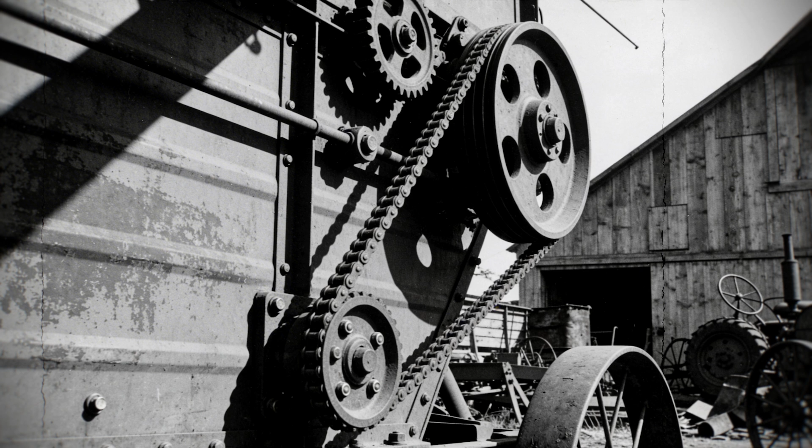This isn't a hypothetical nightmare. This happened to 89 real farmers across America, and the company that built these machines knew about the deadly flaw for years but did almost nothing to stop it.

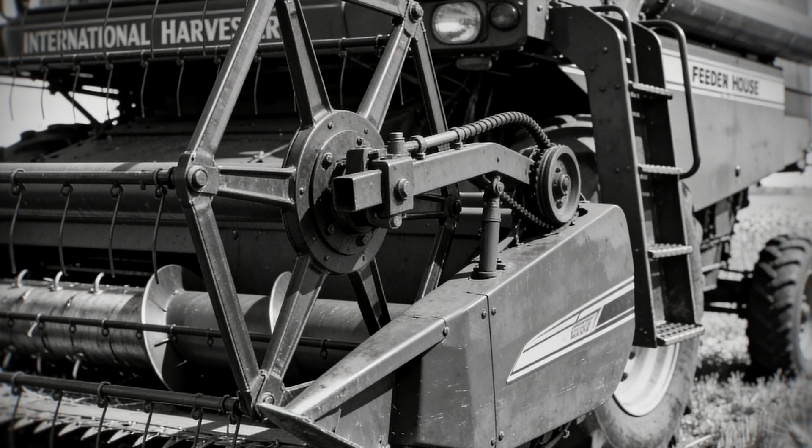International Harvester was once an American icon, a name that defined farming for generations. Founded in the early 1900s, the company built tractors, combines, and equipment that helped feed the world. By the 1970s and 80s, their red machines were everywhere, from family farms in Iowa to massive operations in California. Farmers trusted the brand because International Harvester had earned that trust over decades. But that trust was about to be shattered in the most brutal way imaginable.

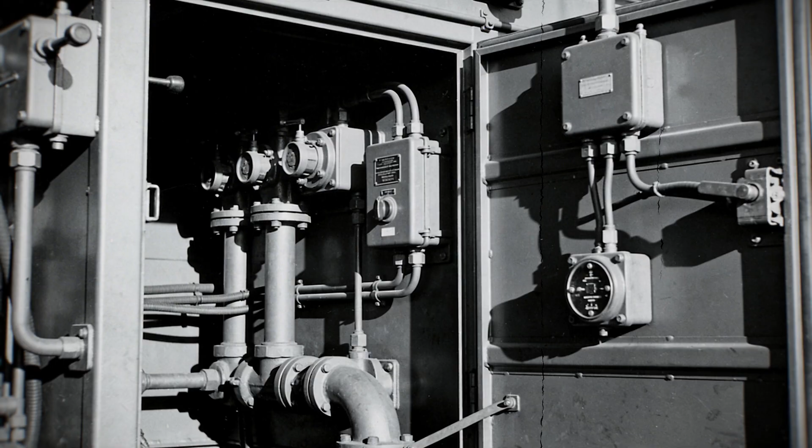The company introduced a line of combine harvesters that featured a design element that seemed innovative at the time: a hydraulically operated feeder house door. This door was positioned at the front of the combine where crop material entered the machine. It needed to open for maintenance, adjustments, and clearing blockages, which happened frequently during harvest. The hydraulic system meant the door could be opened and closed with the flip of a switch, no manual lifting required. Sounds convenient, right? But hidden within this convenience was a ticking time bomb that would destroy lives.

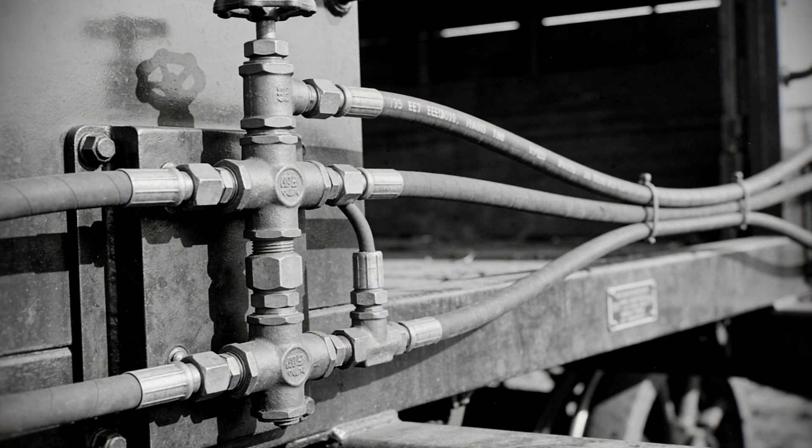The problem was simple but devastating. The hydraulic system that controlled the feeder house door had no safety mechanism to prevent it from closing unexpectedly. None. No redundant valve, no mechanical lock, no warning system. If there was a pressure surge in the hydraulic system, which could happen for various reasons, including normal vibrations from the machine's operation, the door could slam shut without warning.

And because the door was positioned exactly where farmers needed to reach in to clear crop blockages or make adjustments, their hands and arms were constantly in the danger zone. Imagine working on a machine where a 200-pound steel door can close on you at any moment, with enough force to crush bone like it's a soda can.

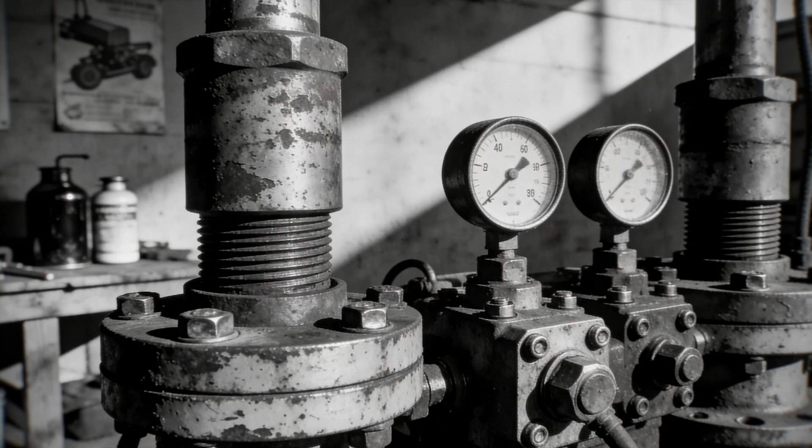That was the reality for thousands of farmers who bought these combines. The force wasn't gentle, it wasn't a pinch. Hydraulic systems operate at pressures of 2,000 pounds per square inch or more. When that door closed on someone, it closed with the kind of force normally reserved for industrial presses.

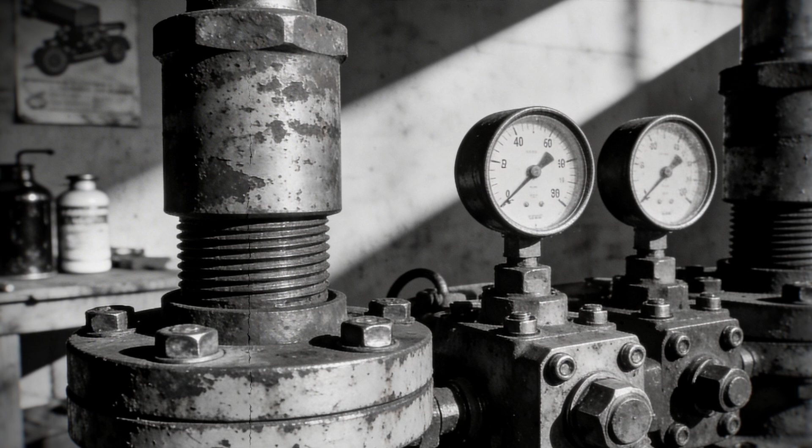The first incidents started appearing in the late 1970s, shortly after these combines hit the market. A farmer in Nebraska reached into the feeder house to clear a blockage of wet straw, a routine task he'd done 1,000 times before on older machines. The door closed on his hand, severing 3 fingers instantly. He was rushed to the hospital, but the damage was done.

His farming career, which had spanned 3 generations of his family, was effectively over. He couldn't operate equipment with one hand. He couldn't do the physical labor that farming demanded. His entire livelihood was destroyed in a fraction of a second.

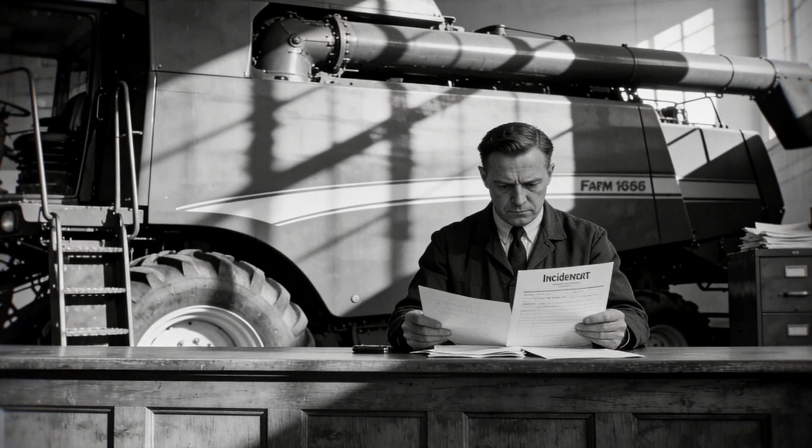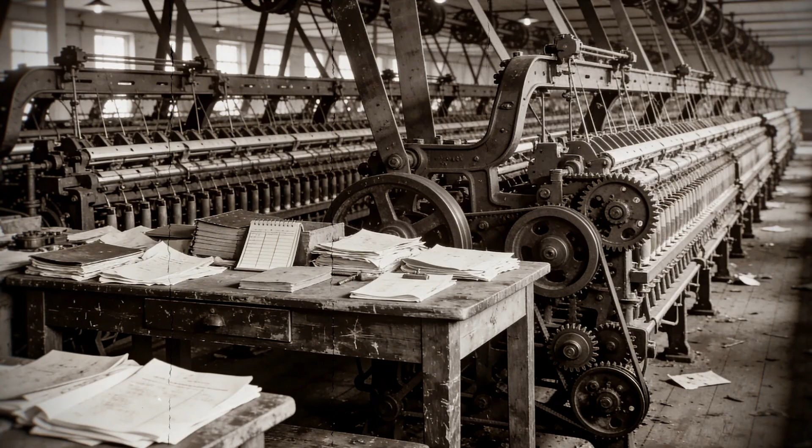And here's the kicker. International Harvester was notified about this incident. The dealer who sold him the combine filed a report. The company knew that their design had just destroyed a man's hand. But instead of issuing a recall or even a safety bulletin, they did virtually nothing. They treated it as an isolated incident, an anomaly, bad luck.

Except it wasn't isolated at all. It was the beginning of a pattern that would repeat itself dozens and dozens of times. Over the next several years, similar incidents kept happening with disturbing regularity.

A farmer in Kansas lost 4 fingers. Another in Missouri had his entire hand crushed so severely that amputation was the only option. A father and son operation in Illinois saw the son's arm broken in 3 places when the door closed on him mid-forearm. The stories were horrifying, and they all followed the same script.

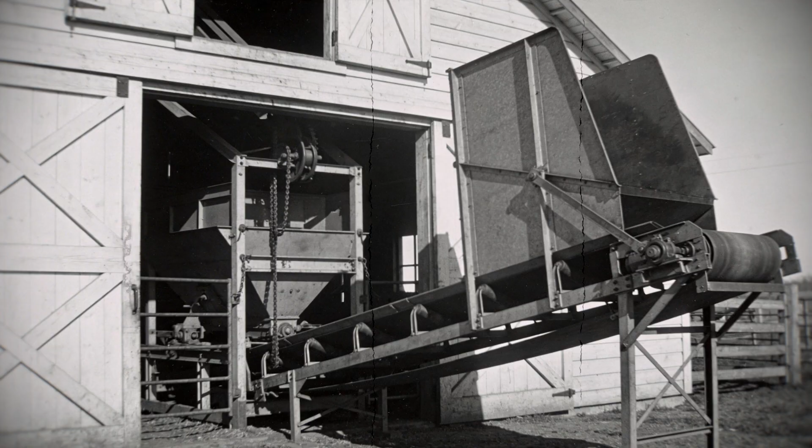The farmer would be doing routine maintenance or clearing a blockage. The feeder house door would be open. Then, without any warning, without any input from the operator, the door would slam shut. The force was so immense that victims described hearing their own bones snap before they felt the pain.

Many went into shock immediately. Those working alone in remote fields faced an additional nightmare, trying to free themselves from the machine while in excruciating pain, then driving themselves to get help before they bled out.

Some farmers were trapped for hours before help arrived. The psychological trauma of these incidents was almost as devastating as the physical injuries.

Now, you might be wondering how International Harvester responded to these mounting injuries. Surely, once they had multiple reports of the same type of injury occurring on the same model of equipment, they would take action, right? Here's where the story gets even darker.

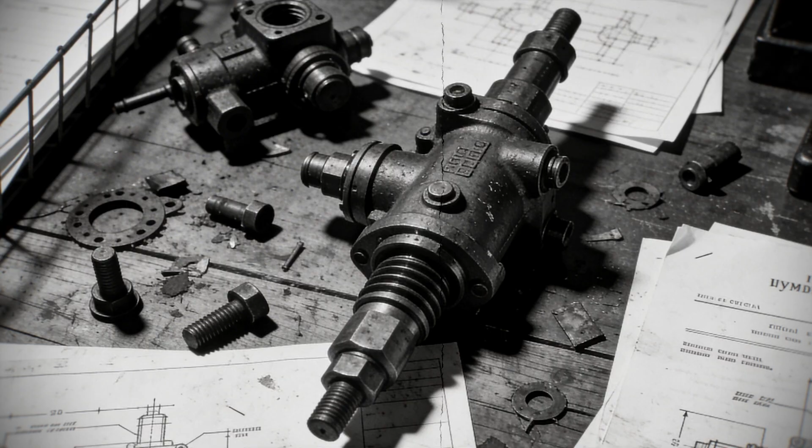Internal documents that later came to light during legal proceedings showed that the company was absolutely aware of the problem. Dealers were filing reports. Farmers were calling in complaints. The pattern was unmistakable. But International Harvester made a calculated business decision.

They determined that issuing a recall or redesigning the hydraulic system would be too expensive. They ran the numbers and decided that it was cheaper to deal with lawsuits from injured farmers than to fix every machine in the field.

Let that sink in for a moment. They knew people were losing fingers, hands, and arms. They knew the design was defective, and they chose profit over safety. This wasn't negligence. This was a conscious choice to value money over human lives and livelihoods.

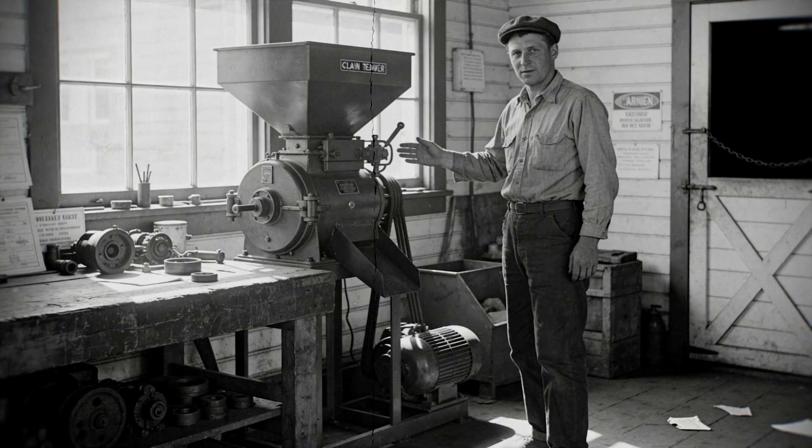The dealers who sold these machines were in an impossible position, as many of them knew about the defect because they were hearing directly from their customers who'd been injured or who'd had close calls. Some dealers, to their credit, tried to warn new buyers.

They'd tell farmers to be extremely careful around the feeder house door, to never reach in without first shutting down the entire machine, to treat the door like it was spring-loaded and ready to kill you. But these warnings weren't standardized, and they weren't nearly enough.

Other dealers, either unaware of the full scope of the problem or unwilling to jeopardize sales, said nothing. They'd hand over the keys to a $60,000 combine and send the farmer on his way without mentioning that the machine had a design flaw that could cost him his hand.

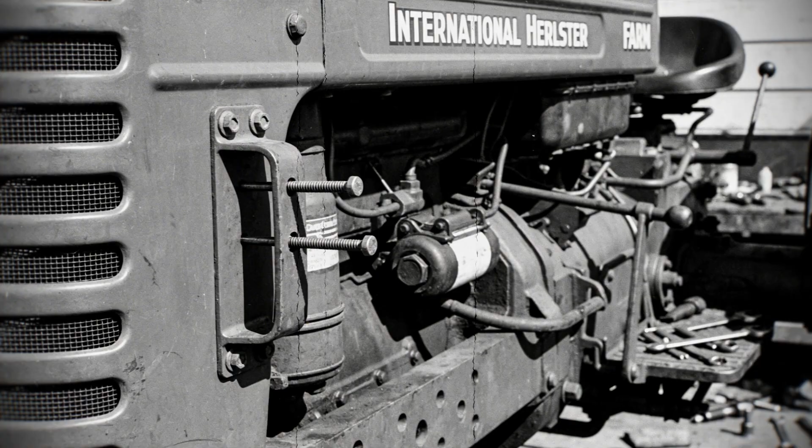Some dealers did try to jury-rig solutions, like installing manual pins that could lock the door open, but these modifications weren't approved by International Harvester, and they voided warranties. Farmers were caught in a nightmare scenario where the machine they'd mortgaged their farm to buy could maim them at any moment.

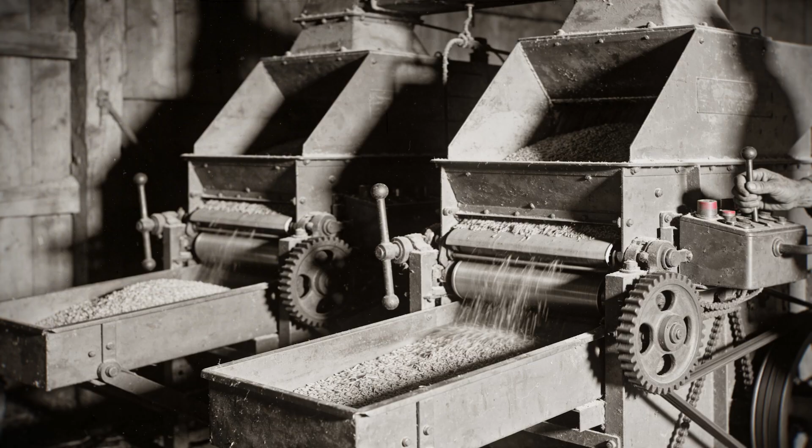By the mid-1980s, the injury count had climbed to 89 documented cases. 89 farmers who'd lost fingers, hands, or suffered severe crush injuries. And those were just the documented cases, the ones that made it into official reports or lawsuits.

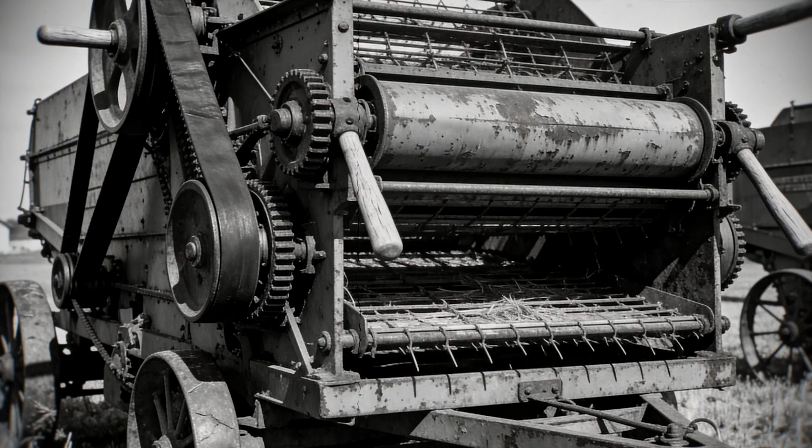How many more close calls happened that were never reported? How many farmers had the door close on them, but managed to pull their hand away at the last possible second? How many minor injuries occurred where the farmer just bandaged himself up and went back to work because harvest doesn't wait and he couldn't afford downtime? The real number of people put at risk was certainly much higher.

Each of those 89 documented cases represented a family devastated, a livelihood destroyed, and years of medical procedures and rehabilitation. Many of the victims required multiple surgeries to reconstruct mangled hands. Some never regained full use of their injured limbs. The medical bills alone were staggering, and this was before the era of widespread health insurance coverage for farmers.

The legal battles that eventually erupted were fierce. Injured farmers started suing International Harvester, and as more cases piled up, the pattern became undeniable.

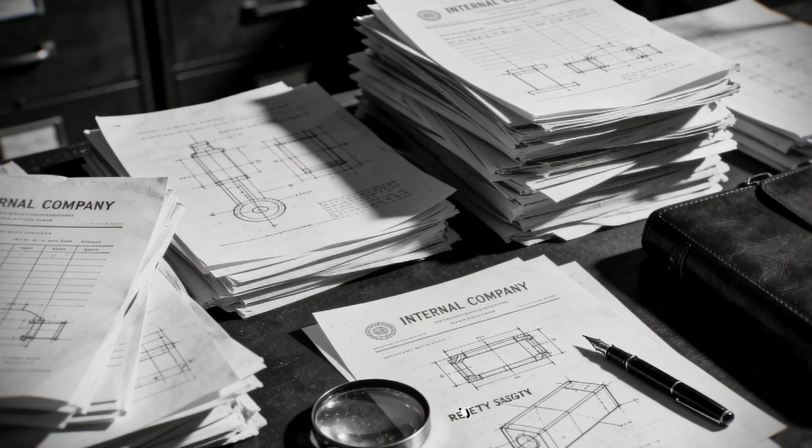Lawyers obtained internal company documents through discovery that showed the company had knowledge of the defect years before they took meaningful action. Testimony from engineers revealed that alternative designs with safety features had been proposed but rejected as too costly. The evidence painted a damning picture of a corporation that prioritized its bottom line over customer safety.

Juries were sympathetic. In several cases, they awarded not just compensatory damages to cover medical bills and lost income, but also punitive damages designed to punish the company for its reckless behavior.

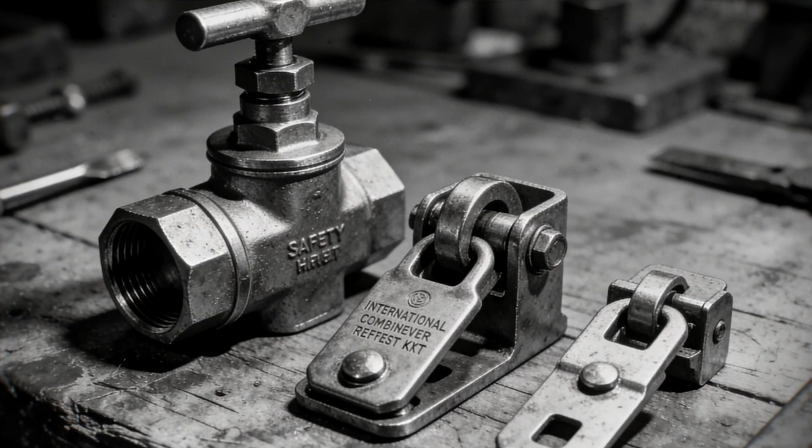One case in Iowa resulted in a multi-million-dollar verdict when the jury heard testimony about how many internal reports the company had received before the plaintiff lost 3 fingers. The message from these juries was clear. If you know about a deadly defect and you choose to do nothing, you're going to pay.

Eventually, under pressure from mounting lawsuits and negative publicity, International Harvester did issue a retrofit kit for the affected combines. This kit included a safety valve that would prevent the accidental closure of the feeder house door and a mechanical lock that could be engaged when someone needed to work near the opening. It was exactly the kind of fix that should have been included from day one.

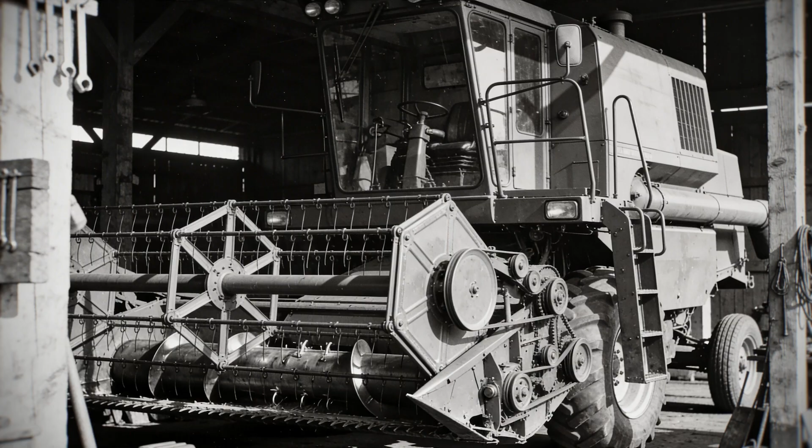But by the time this retrofit was rolled out, 89 farmers had already paid the price for the company's negligence. And even then, the retrofit wasn't automatic. Farmers had to bring their combines in to have the kit installed, and many never got the word or couldn't afford the downtime during critical harvest periods.

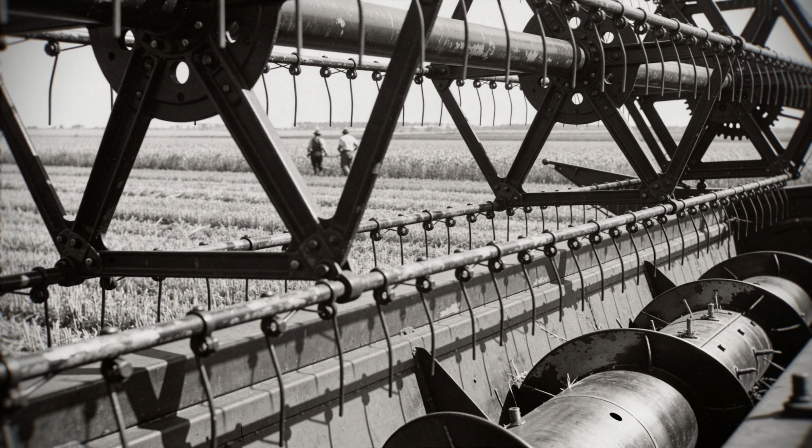So even after a solution existed, there were still dangerous machines operating in fields across the country. International Harvester also didn't admit any wrongdoing. They framed the retrofit as a product improvement rather than a safety recall, trying to protect themselves from additional liability.

The aftermath of this scandal went beyond the individual victims. International Harvester's reputation took a massive hit among the farming community. Trust, once broken, is incredibly hard to rebuild, especially in tight-knit rural communities where word travels fast. Farmers started looking at other brands, and International Harvester was already struggling financially due to other business problems.

As the company eventually collapsed and was absorbed by other agricultural equipment manufacturers, while it's impossible to say exactly how much the feeder house door scandal contributed to the downfall, it certainly didn't help. The 89 victims and their families were left to pick up the pieces of their lives. Many had to leave farming entirely because they could no longer perform the physical work. Some sank into depression, watching their family farms get sold off because they couldn't operate them anymore. The ripple effects touched entire communities as productive farms went under, and families struggled with medical debt and disability.

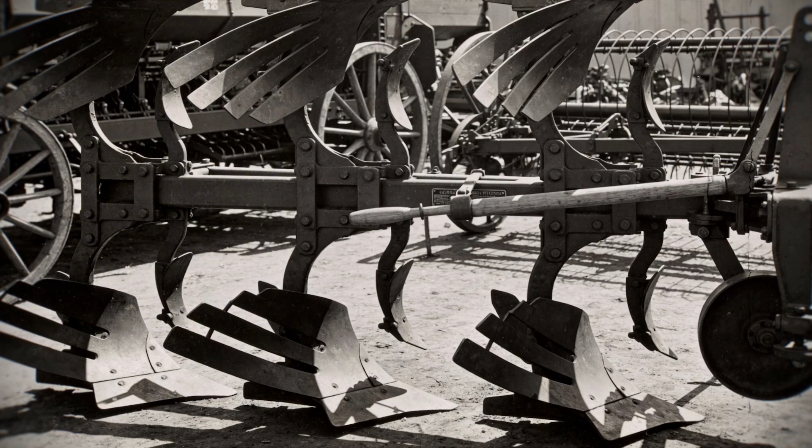So, what are the lessons from this tragic chapter in American agricultural history? First, it's a stark reminder that corporate accountability matters. When companies know about defects and choose to hide them or ignore them, people get hurt. The system of lawsuits and legal liability exists precisely to give victims recourse and to punish companies that put profit over safety.

Second, it shows the importance of regulatory oversight in industries where dangerous machinery is involved. While farming equipment isn't regulated as heavily as, say, automobiles, perhaps it should be. Farmers deserve the same safety protections as any other workers.

Third, this story highlights the vulnerability of farmers, who often work alone with dangerous equipment and who face intense economic pressure to keep working, even when conditions are unsafe. The pressure to get the harvest in, to keep the farm running, to avoid costly downtime, that pressure led many farmers to take risks they shouldn't have had to take.

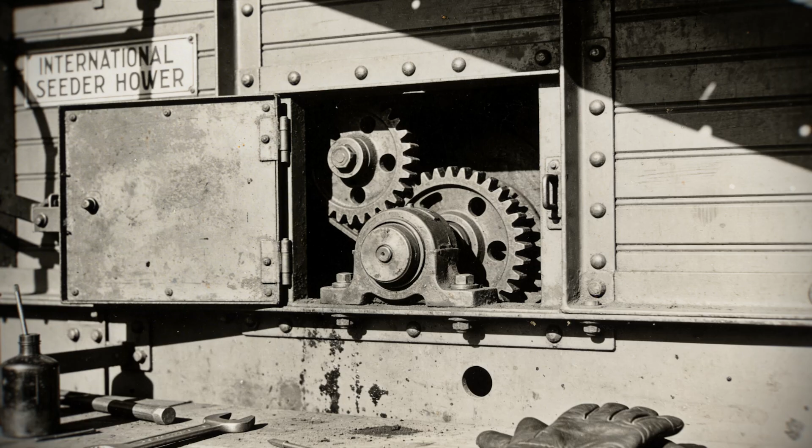And finally, this is a story about the human cost of negligence. Behind each of those 89 cases was a real person with dreams, responsibilities, and families who depended on them. The International Harvester feeder house door scandal isn't just ancient history. It's a cautionary tale that remains relevant today.

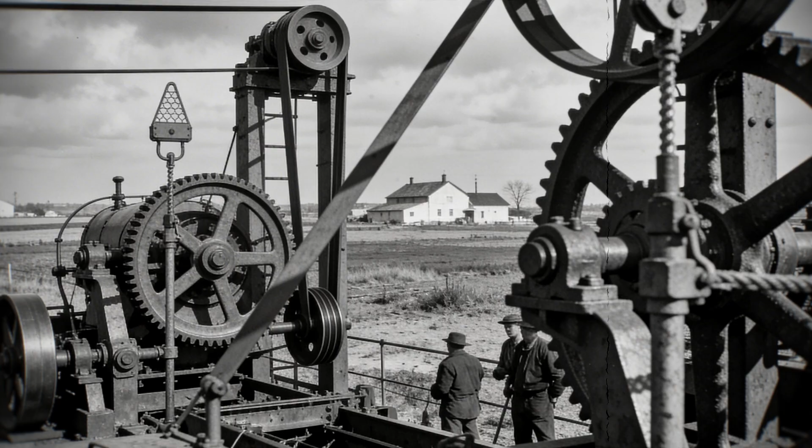Agricultural equipment is more complex than ever, with computerized systems and automated functions that can fail in unexpected ways. Farmers still work with dangerous machinery every single day, often in isolated conditions where help isn't immediately available.

The question we should be asking is, has the industry truly learned from disasters like this one? Are modern equipment manufacturers building safety into their designs from the ground up? Or are they still making cost-benefit calculations about whether it's cheaper to pay lawsuits than to engineer better safety features? The answer, unfortunately, is mixed.

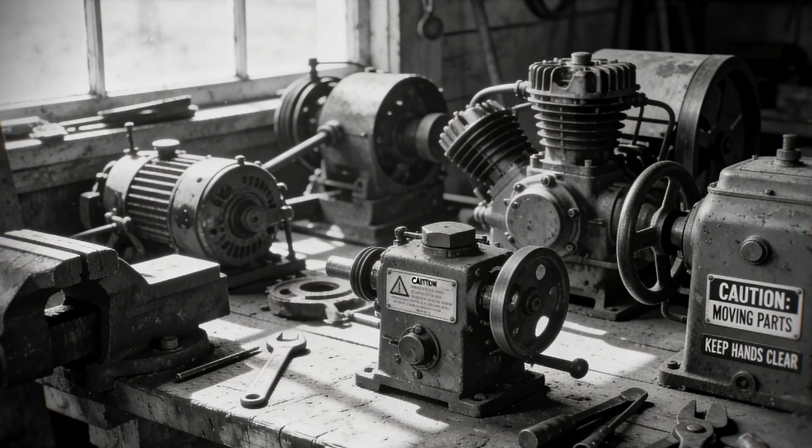While safety has generally improved and modern equipment does include more safeguards, there are still incidents of preventable injuries occurring because a manufacturer cut corners or failed to adequately warn users about known risks.

If you're someone who works in agriculture or knows farmers, this story should resonate deeply. It's a reminder to never trust that equipment is safe just because it's new or because it comes from a reputable brand. Always read safety manuals, always follow lockout procedures when doing maintenance. Why? And never assume that a company has your best interests at heart.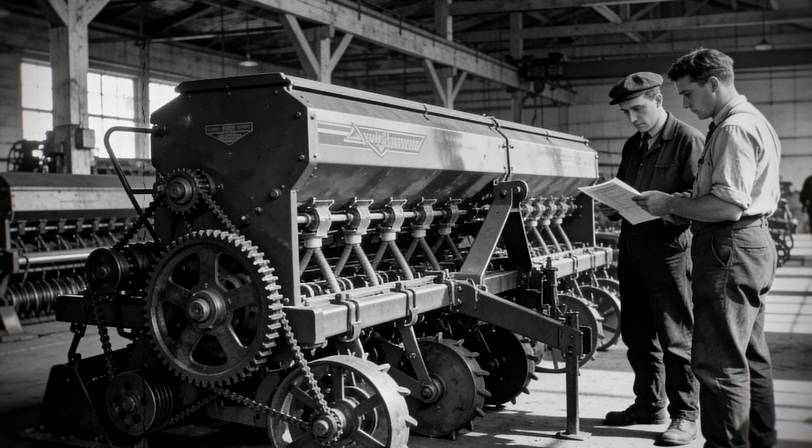For decades, farming had been treated differently from other industries. Factory workers had OSHA regulations, construction crews had safety standards, but farmers were largely left to fend for themselves. The International Harvester scandal helped change that perception, at least gradually.

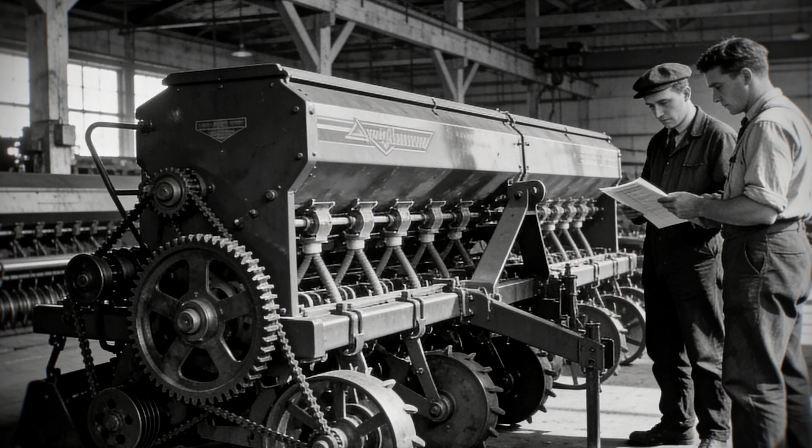Advocacy groups began forming to push for better equipment standards and more rigorous safety testing before machinery was released to market. These organizations worked to educate farmers about their rights and to pressure manufacturers into being more transparent about known risks. The movement wasn't as dramatic as some industrial safety reforms, but it represented a real shift in how the farming community viewed safety. Farmers started demanding better, and some manufacturers began to listen, understanding that ignoring safety concerns would damage their reputation and bottom line.

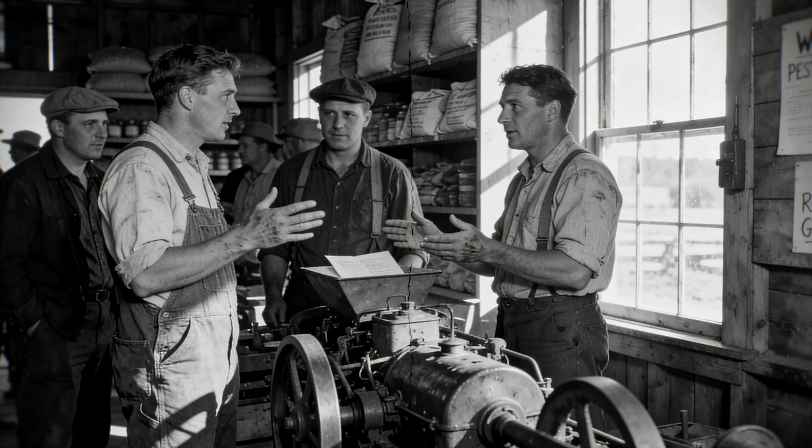One fascinating aspect of this story is how word of mouth functioned in the pre-internet era. Information about the feeder house door defect spread through farmer networks, at feed stores, at agricultural co-ops, and at county extension offices. Even without social media or email, farmers talked to each other, and warnings about dangerous equipment traveled from person to person. Some of the dealers who cared about their customers became informal safety ambassadors, calling farmers who'd bought these combines to warn them about the danger.

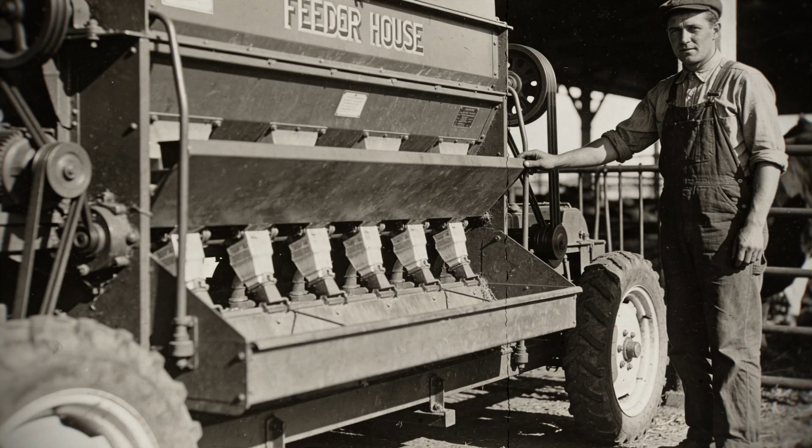These relationships between dealers and farming families often went back generations, and when a dealer knew his customer's life could be at risk, he felt a personal obligation to reach out. This human element of the story often gets lost when we focus on the corporate negligence. But it's important to remember that there were good people working within the system who tried to do the right thing even when their employers weren't.

Their efforts likely saved lives by encouraging farmers to be more cautious around the feeder house door, even before the retrofit kit became available. The engineering community also grappled with the lessons from this scandal. Agricultural equipment designers began discussing the case in training programs and professional development courses as an example of what happens when cost considerations override safety engineering principles.

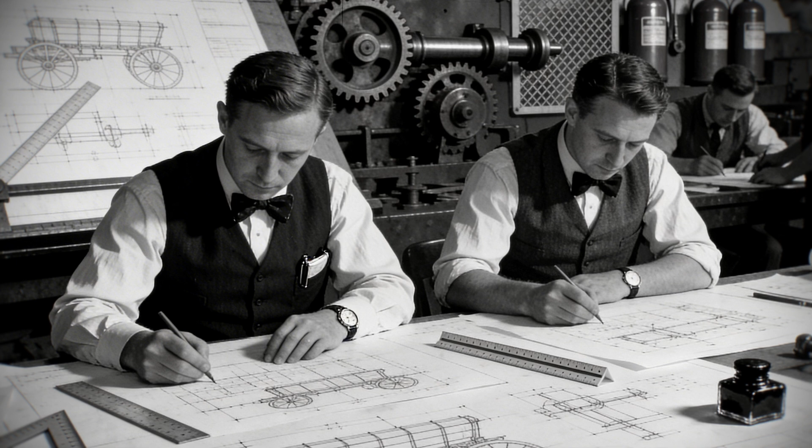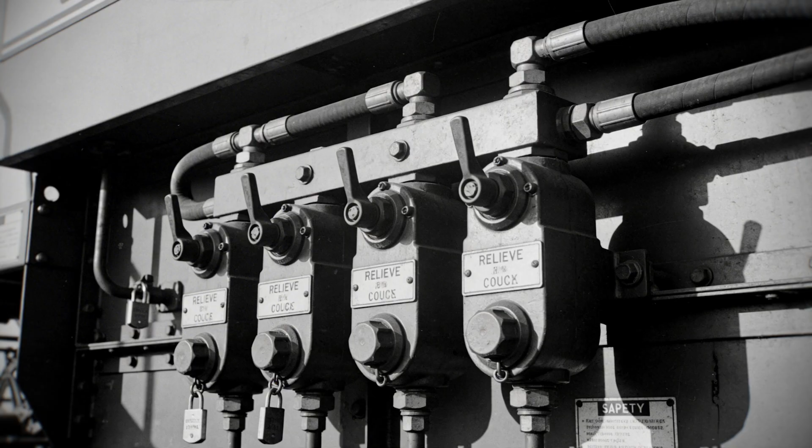Design standards gradually improved across the industry as manufacturers realized that cutting corners on safety could have catastrophic consequences for their business reputation. Modern combine harvesters now include multiple redundant safety systems for any component that could cause serious injury. Hydraulic systems have relief valves, mechanical locks, and in many cases, electronic sensors that detect when a person is in a dangerous area. The feeder house door on today's combines often includes proximity sensors that shut down the hydraulic system if someone gets too close.

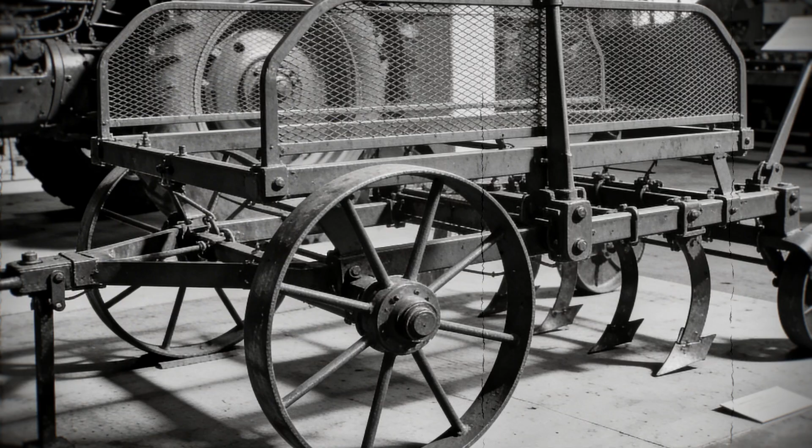These aren't features that were added because they were trendy or because someone thought they might be nice to have. They exist because lessons were learned from the blood and suffering of farmers like those 89 victims. Every safety feature represents a tragedy that was prevented, and we owe that to the farmers who fought for accountability.

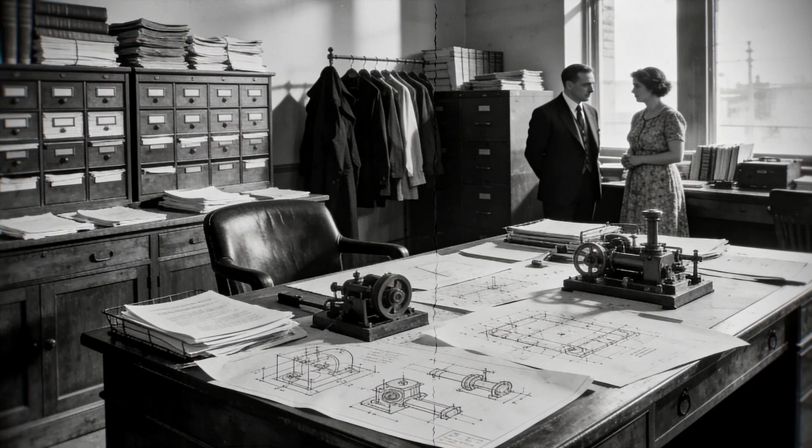The legal precedent established by the International Harvester cases also extended beyond agricultural equipment. Product liability law in America was significantly shaped by agricultural machinery cases because they provided such clear examples of manufacturers knowing about defects and choosing to ignore them.

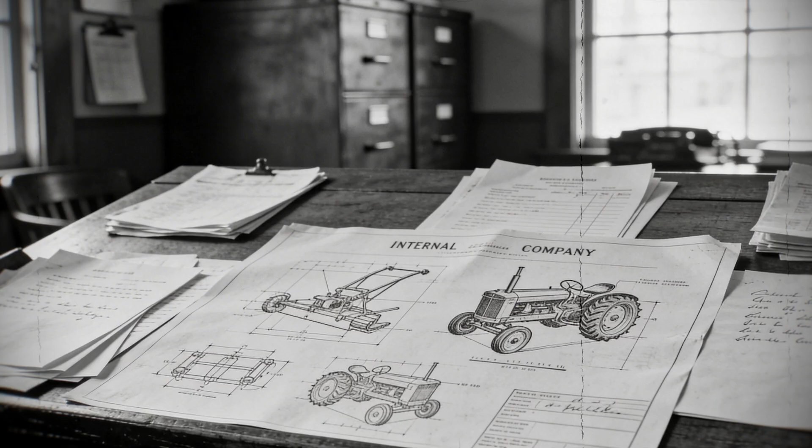Lawyers who worked on these cases went on to take on defective product cases in other industries, using the same discovery techniques and legal arguments. The evidence that internal company documents could prove knowledge of defects became standard practice in product liability litigation. Without these pioneering agricultural equipment cases, the legal landscape around product safety might look very different today.

It's one of those instances where rural America's struggles helped establish protections that eventually benefited everyone, even though the farming community didn't always get credit for it.

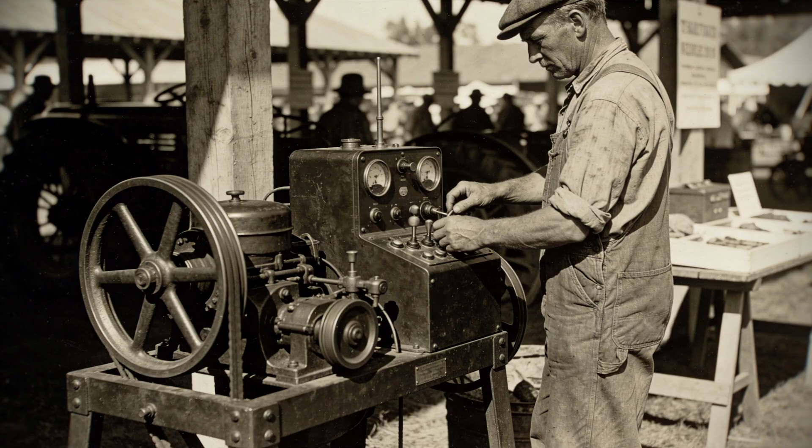For the survivors of these incidents, life after injury was a journey of adaptation and perseverance. Many farmers learned to operate equipment with prosthetics or adapted machinery to work with their physical limitations. Some became advocates themselves, traveling to agricultural conferences and farm shows to tell their stories and educate other farmers about safety.

Their willingness to relive their trauma publicly, to show their injured hands to audiences, to describe in graphic detail what happened to them, required extraordinary courage. These advocates didn't do it for compensation or publicity. They did it because they didn't want anyone else to experience what they'd been through.

Their voices became part of the safety movement, giving it authenticity and emotional weight that no regulatory document could match. When a farmer who lost 3 fingers stood up and told his story, other farmers listened in a way they might not have to a safety consultant or engineer. Peer testimony carries weight in close-knit communities.

The manufacturer's response to increased safety demands also reveals something interesting about how industries evolve.

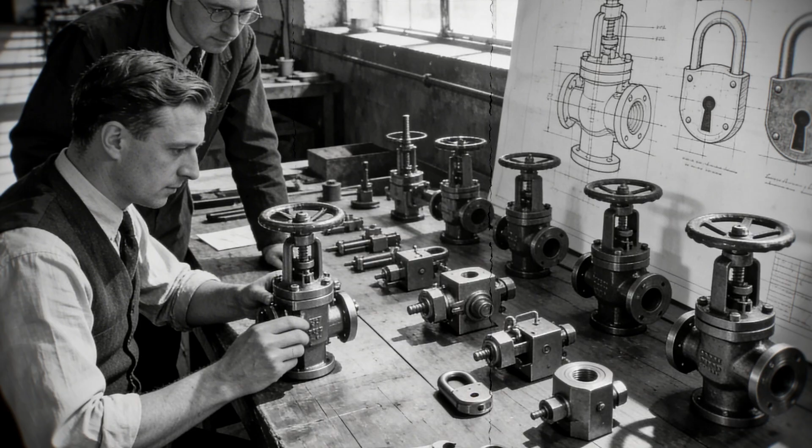Once lawsuits started piling up and the legal liability became clear, equipment manufacturers found that improving safety actually wasn't as expensive as they'd initially calculated. When engineers are tasked with solving a safety problem rather than being told to cut costs, they often find elegant solutions that add minimal expense to production. The hydraulic relief valves and mechanical locks that eventually became standard on feeder house doors cost only a fraction of what the early lawsuits cost International Harvester.

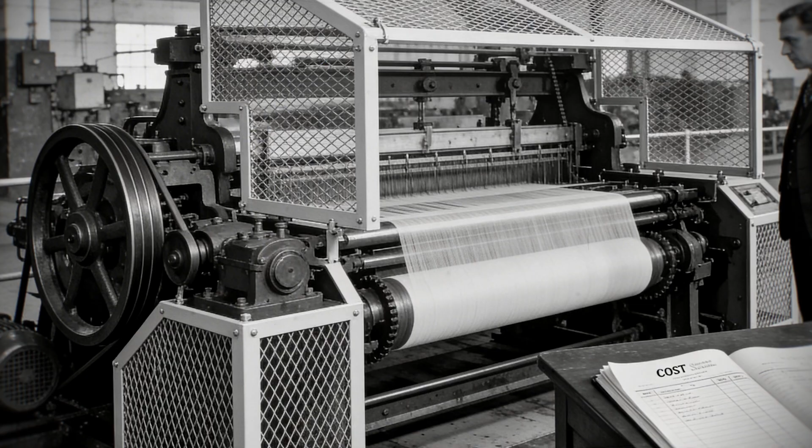This pattern has repeated itself throughout industrial history. Companies resist safety improvements until legal and financial pressure forces them to implement what they claim would be too expensive. Then they implement the changes and discover they weren't as costly as feared. It's a frustrating dynamic that suggests many safety improvements could happen faster if companies had the right incentives from the start.

The families of injured farmers also had to navigate the psychological and financial aftermath. Medical bills for reconstructive surgery on mangled hands could total hundreds of thousands of dollars. Multiple surgeries were often needed, spread over years, with no guarantee that full function would be restored. Insurance coverage was spotty at best for many farms, and disability benefits for self-employed farmers were much less comprehensive than they are today. Families had to make gut-wrenching decisions about whether to continue pursuing multiple surgeries that might only marginally improve function, or to accept the permanent injury and move forward.

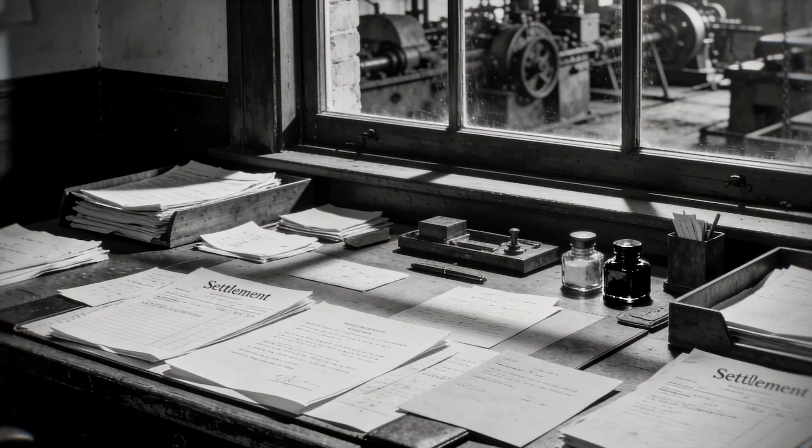Some farmers received large lawsuit settlements, but the money came years after the injury, and there's no price that can compensate for losing the use of your dominant hand. The financial settlements also created complicated feelings. Some victims felt that accepting money was like accepting compensation for their suffering, as if the injury could somehow be redeemed through dollars. Others felt bitter that it took money to get the company to care about safety, that no amount of injury reports had moved them until lawsuits started costing them. These psychological complexities rarely appear in legal documents, but they shape the lives of survivors and their families profoundly.

As time passed and International Harvester faded from the farming landscape, the memory of the feeder house door scandal began to fade as well. Younger farmers who started operating equipment after the company's equipment was phased out might have never heard the story. This is one reason why telling these stories remains important decades later.

Institutional memory is fragile, especially in industries where generational knowledge transfer happens through word of mouth and hands-on experience. If the story of the feeder house door becomes just a vague myth rather than a clearly remembered cautionary tale, we risk repeating similar patterns with new equipment manufacturers and new products.

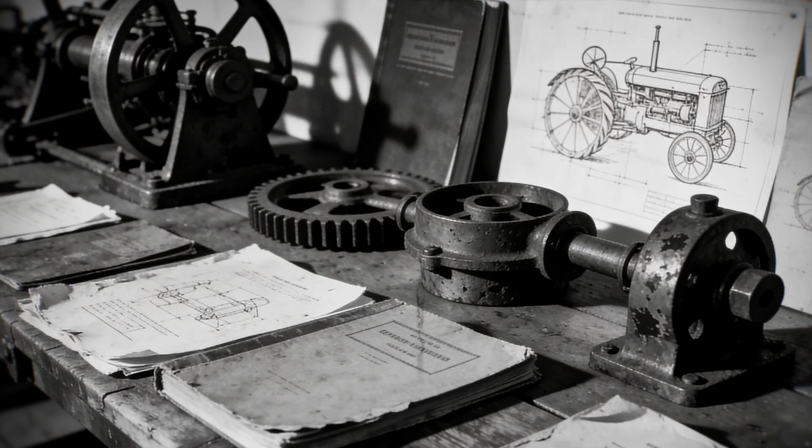History doesn't repeat itself, but as the saying goes, it often rhymes. The specific hydraulic system and the specific combine design are long gone, but the underlying dynamic of cost-benefit analysis trumping safety considerations continues to this day in various forms.

Today's farmers and agricultural workers should take this story as a powerful reminder to never fully trust that any piece of equipment is completely safe, no matter how modern or how reputable the manufacturer. Complacency is dangerous in agriculture. Every piece of machinery deserves respect, careful handling, and adherence to safety procedures.

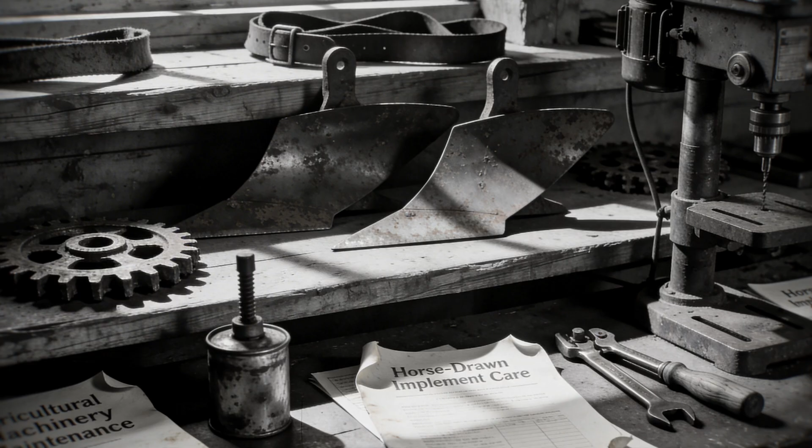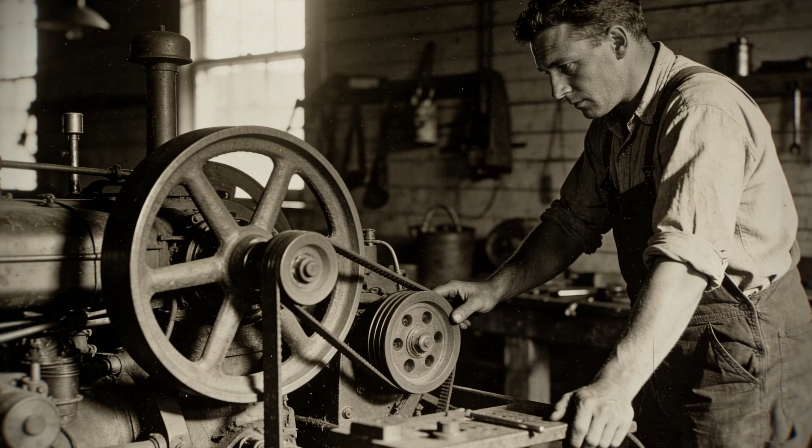Read the manuals even if you've operated similar equipment before. Different machines have different quirks and different hazard points. Talk to other farmers about their experiences with equipment. Join farmer groups online or in person where safety concerns can be discussed openly. And if you discover a potential safety issue with equipment you own, report it. Report it to the manufacturer, report it to dealer networks, and tell other farmers. Your report might be the one that identifies a pattern before dozens of people get hurt.

The 89 farmers who suffered in the International Harvester case didn't choose to become crusaders for safety, but their experience created an obligation for all of us to take safety seriously and to never assume that companies have already considered and solved every hazard. Thank you for watching this deep dive into one of the darker chapters of American agricultural history. The story of the feeder house door reminds us that even trusted institutions can fail us, that profit motives can override human welfare, and that accountability has to come from somewhere, whether that's the legal system, regulatory agencies, or the collective voice of consumers demanding better.